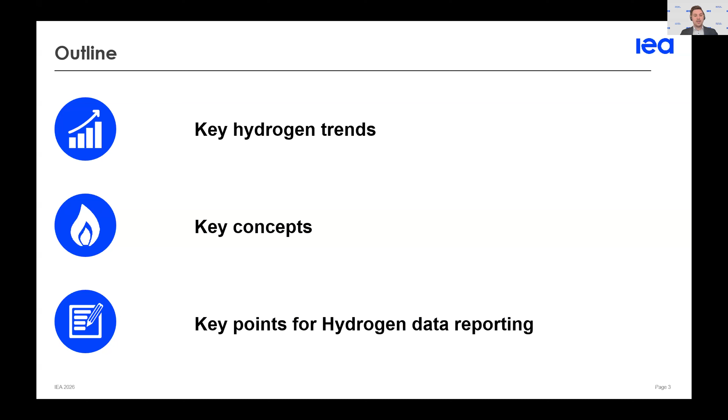Let's get right into it. I want to talk about different topics. First, I want to look at the different key hydrogen trends that we observed throughout the last years. Then I would like to talk about the key concepts, the methodology for reporting, and at the end, the key points for the actual reporting in the questionnaires that we have. Regarding the key hydrogen trends, I will start with an overview, then talk about production and demand, and then also about trade.

So let's first talk about the overview as a whole. Over the last years, there were many investments or committed investment projects for hydrogen, and the number and scale of these projects became larger and larger. All in all, though, hydrogen as an energy vector is still at a very early stage, and it needs regular and effective tracking. Additionally, because of different uncertainties like costs and the lack of infrastructure for now, there are still quite a lot of barriers. But nonetheless, through these trends, we saw the need to develop a common methodology to start the data collection for this commodity. That is why we also came up with this joint Eurostat and IEA annual questionnaire.

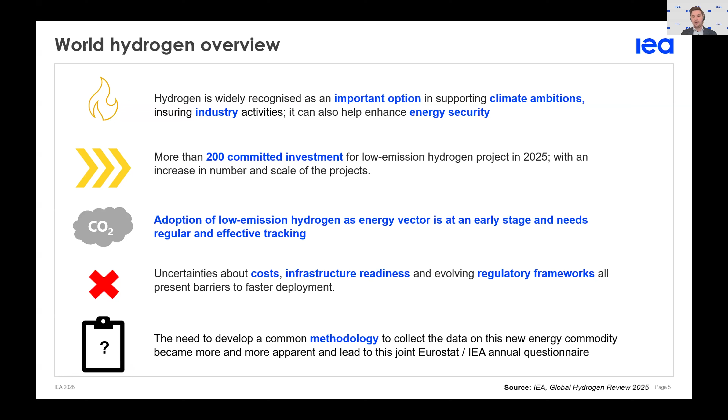Over the last years, global hydrogen demand has increased. It almost reached 100 megatons in 2024, and it is expected to rise even more. Generally, this increase is mostly driven by demand for industrial products that use hydrogen as a feedstock, not really for sustainable activity. That makes up only around 1% of demand, though it is still increasing quite rapidly, with an increase of around 10% in 2024, but the base is still very low. So most of the demand is still conventional and used as a feedstock. Regarding regions, it is visible that especially in China, North America, and in the Middle East, there the most hydrogen use is recorded by region.

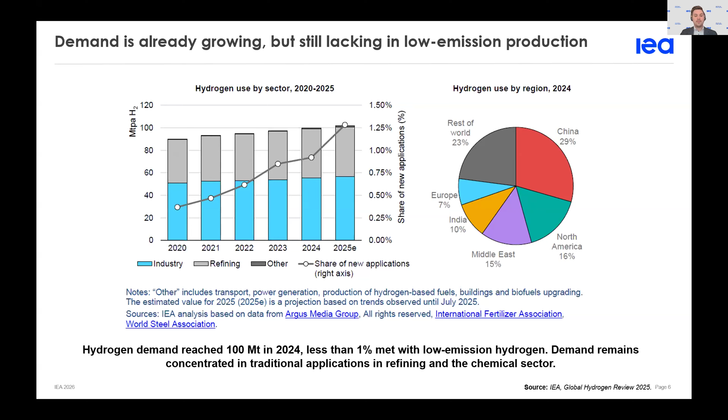If we look at the demand in industry, we can see that it's also growing and is the largest use of hydrogen around the world, with 55 megatons in 2024. From a year-on-year perspective, it increased last year by 3%. Most of this demand, around 60%, is for ammonia production, 30% for methanol, and 10% is in the iron and steel sector. The trends clearly show that demand is growing. Regarding regions, we can see that especially in India and the Middle East the demand is increasing, while in Europe it is going down. That also shows that Europe is more likely to import in the future rather than producing it itself. Generally, hydrogen demand is growing and the growth is also accelerating over the last years.

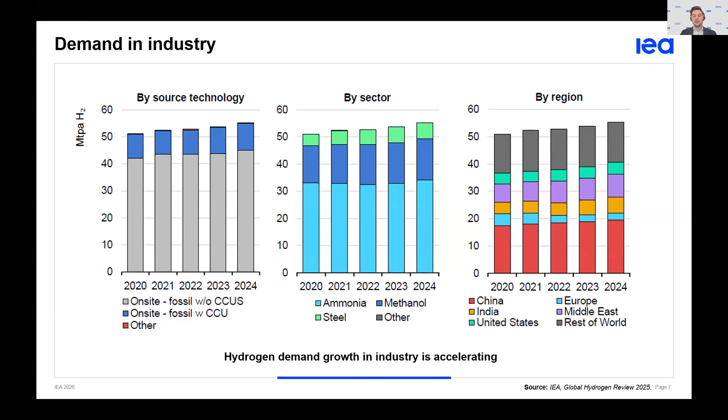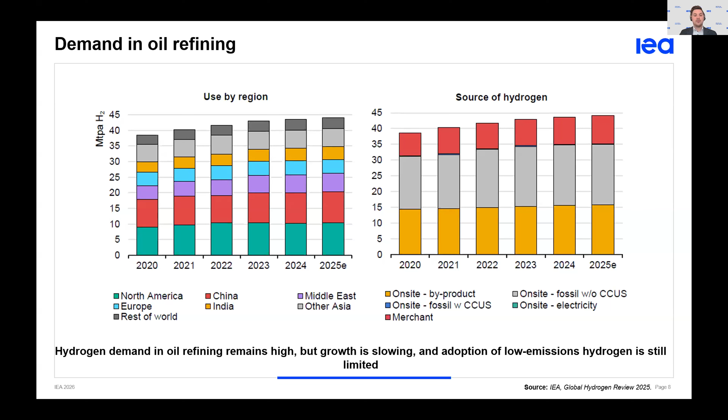Now we will have a look at hydrogen demand in oil refining. Here we can also see that the trend is generally increasing, though the growth has become slower in the last years. Oil refining as a whole is the sector with the second highest hydrogen demand after industry, just slightly below it, with 43 megatons in 2024. Most of the growth in previous years originated from the Middle East. So generally an increasing trend, but slowing down in the last years.

Generally, global hydrogen supply rose by approximately 2% in 2024, and as already mentioned, we are almost around 100 megatons. There is almost no international trade today, or very minimal, so regional output mirrors consumption. For example, China accounts for almost 30% of global hydrogen, followed by North America and the Middle East, both contributing around 15%. So it's very focused on a few regions in the world.

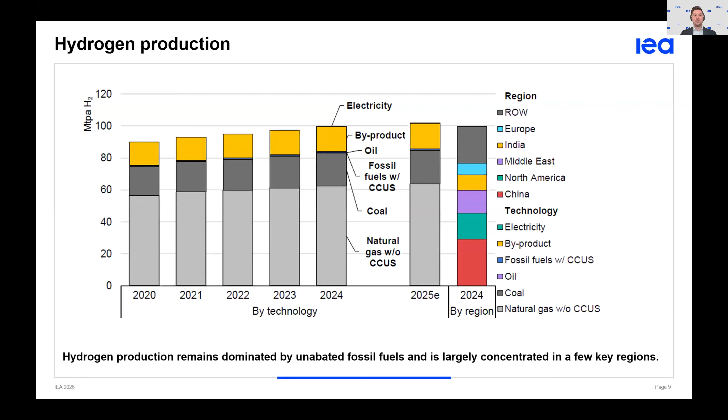Now let's look at the electrolyzer deployment or capacity. Here we can see a very dramatic trend comparing 2024 and the estimated 2025 figures. There is a very large increase, especially in China, where 50% of the new capacity growth is accounted for, especially because of very large installations currently being built up in China.

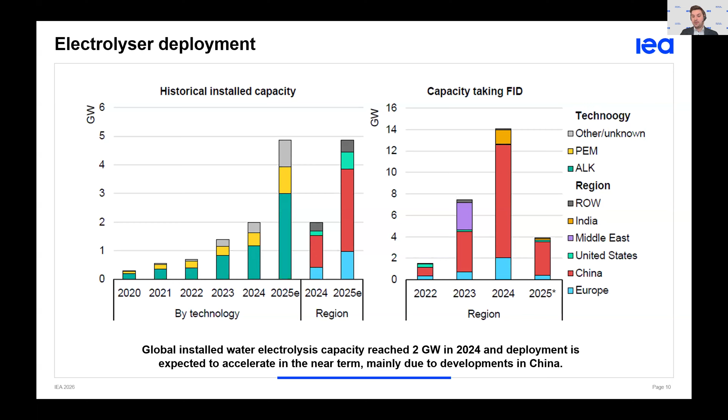So now let's look at the key concepts for hydrogen as a whole. We'll first look at some definitions, then at the hydrogen balance, production, trade, and transformation in refineries. This is basically the structure.

So all in all, hydrogen is a gas that is odorless, non-toxic, and highly combustible. We treat it in energy statistics like a derived or secondary product, similar to secondary oil products. The unit of measure is terajoules, generally used in the questionnaire. Regarding purity, there is a common methodology of using 98% purity, because it is assumed that below this purity level there is no real possibility or need to use hydrogen.

So what we are covering in the statistics is generally the intentional production and also the production as a byproduct. Then the consumption is both when it's auto-produced and auto-consumed, the quantities. We also capture energy and non-energy use. What is also important is that we're not looking only at clean or green hydrogen, so it is not really like a sustainability accounting. We are accounting for all hydrogen.

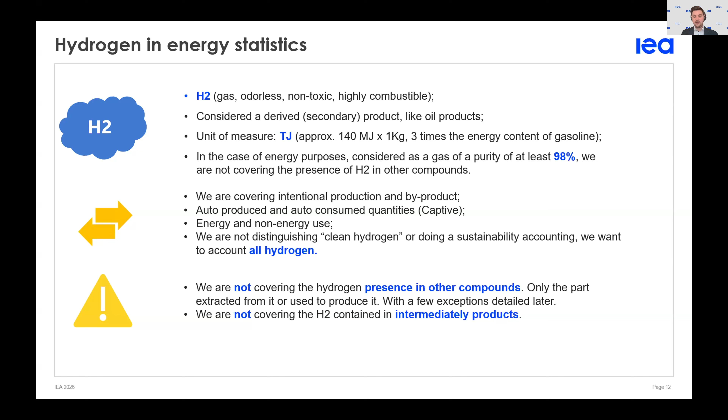As we saw before in the conventional cases with oil refineries, for example, we really want to account for all hydrogen. Another important point is that we do not cover hydrogen that is present in other compounds. Only if the hydrogen is extracted from another compound, or if it is used to produce another compound, then we account for it. Otherwise not, except a few exceptions that we will cover in a second. And also we are not covering the hydrogen that is contained in intermediary products. So regarding the exceptions, as I just mentioned, there are two of them.

So those are ammonia. That is a commodity that is, as we saw before in the trends, already produced and also exchanged a lot worldwide. There are different applications in both non-energy use and energy use, and it is also used as an energy carrier. And therefore, naturally, there is a lot of interaction with hydrogen.

Another exception are e-fuels. Those are still in a very early state, so the production is quite low. But they are basically created through electrolysis, and the same accounts for RFNBOs. Those are renewable liquid and gaseous fuels of non-biological origin. So for these, we also accept them and account for them in the balance, as can be seen later on.

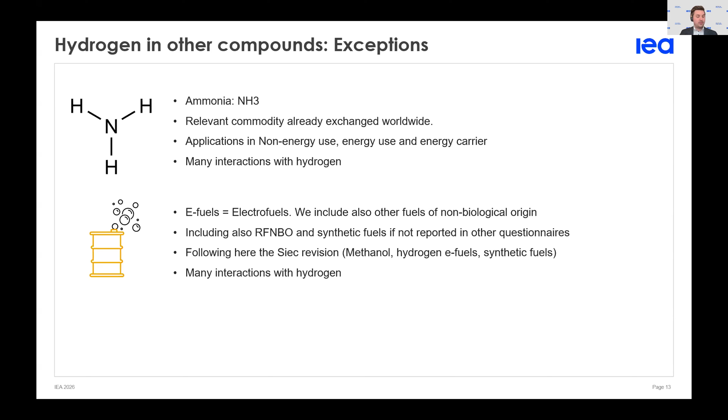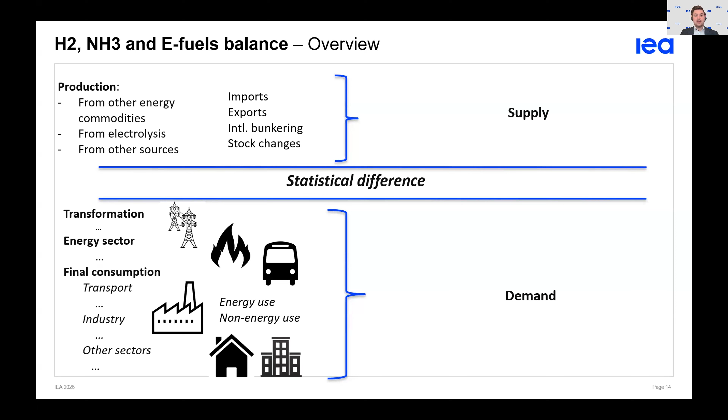So let's first look at production. As already mentioned, hydrogen is not a primary energy product. It is seen as an energy carrier, and therefore it is also produced from different sources, for example fossil fuels, renewables, wastes, electricity, nuclear energy, and also other natural sources. For each of those sources, it has to be reported. Additionally, it has to be reported whether it is with or without carbon capture and storage. So there's this distinction for each of the sources, with and without carbon capture and storage.

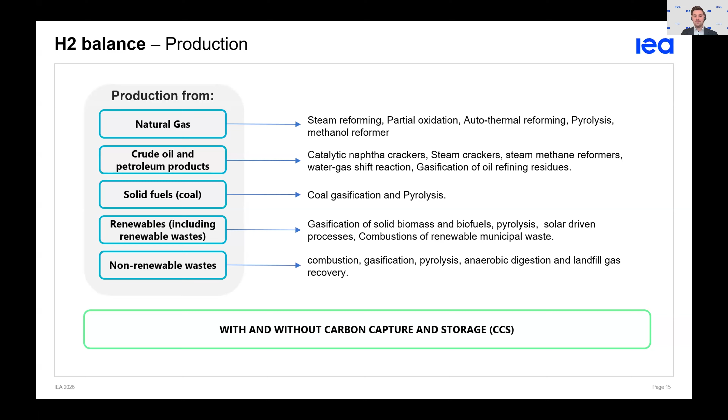Then when we look at electrolyzers, there are also different sources. For example, there's from direct grid electricity. Here it is really the electricity that is used to produce hydrogen, and has been produced from several sources in a central power plant or any other type of infrastructure. And so most of it is from grid electricity.

Then there is the specific case for electricity from renewables, where hydrogen was produced from sustainable renewables directly. Another one is electricity from nuclear, quite self-explanatory, if it is electricity of nuclear origin. And the last one is from fossil fuels, also quite self-explanatory. For all other cases, there is electricity others. As you can see at the bottom of the slide, DL means direct line, so only the electricity production that is physically connected to the electrolyzer should be accounted for.

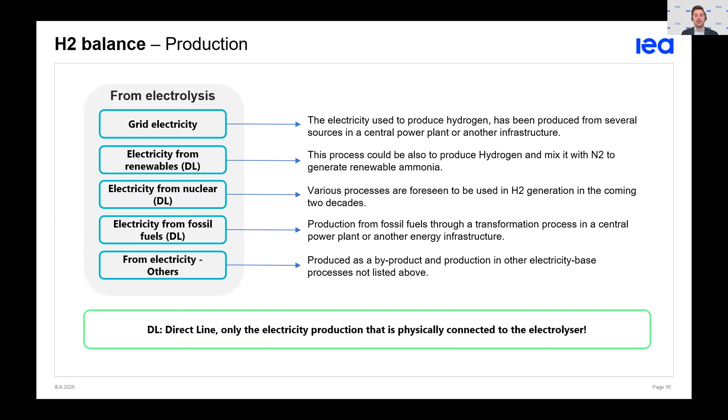Regarding production of ammonia and e-fuels, the same accounts for ammonia. We need to look at all the different energy sources: fossil fuels, renewables, waste, electricity, nuclear energy, and other natural resources. This has to be reported, and also the ammonia has to be reported regardless of whether it is for energy or non-energy purposes. Most of the ammonia production as of now comes from natural gas, which is the most common, helping to see what is most relevant.

Then also regarding e-fuels and RFNBOs, those can also be reported here, also from the different sources. It is basically very similar, but as already mentioned before, it is still at a very early stage of development. So this is less relevant as of now, but it will be reported here.

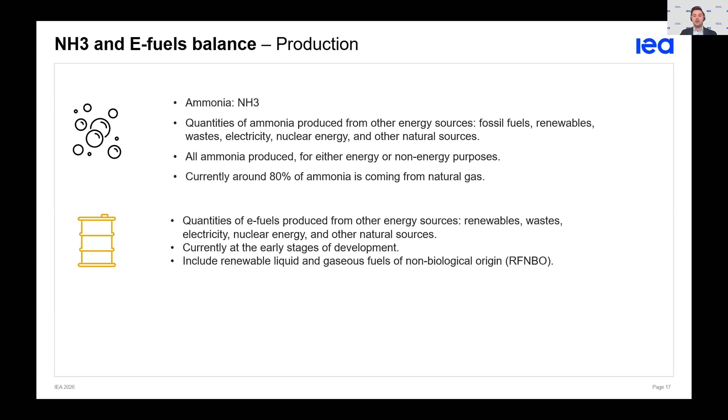Now regarding trade, as in the other annual questionnaires, what is most important is focusing on the country of origin and of the final destination when talking about trade. Most of the hydrogen trade as of now is done by pipeline. Other options include, for example, the transformation into ammonia, as mentioned before, and then it can also be traded.

All of the transformation losses that happen during these processes of transformation will be recorded under transformation losses. So also quite straightforward. And if there is any other form that is used for the trade of hydrogen, it should be reported in the remarks sheet.

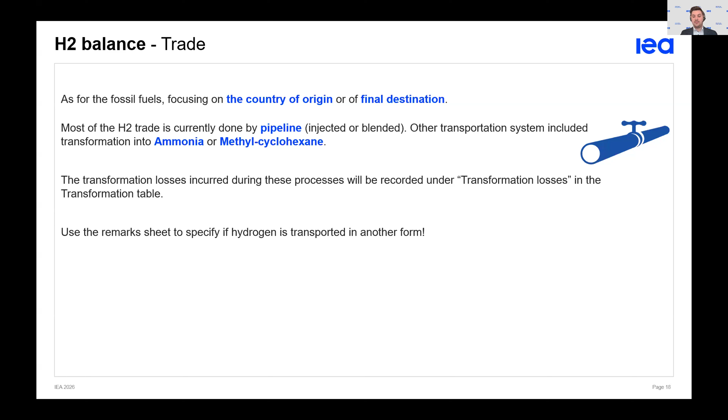There it is converted to gas. The third one is the Haber-Bosch process, where the hydrogen is transformed into ammonia. And last but not least, the Fischer-Tropsch process, where e-fuels are created from hydrogen through electrolysis.

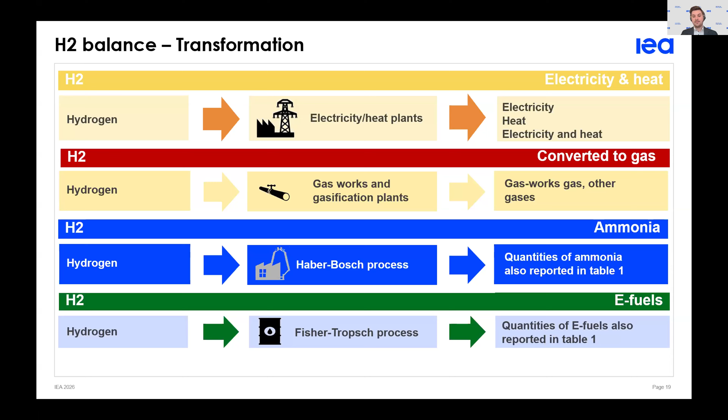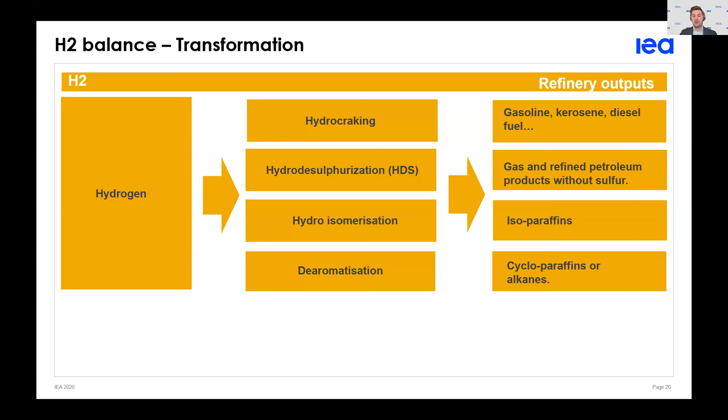And the last one is de-aromatization, where basically aromatics are hydrogenated to cycloparaffins or alkanes. So those are the different applications in refineries.

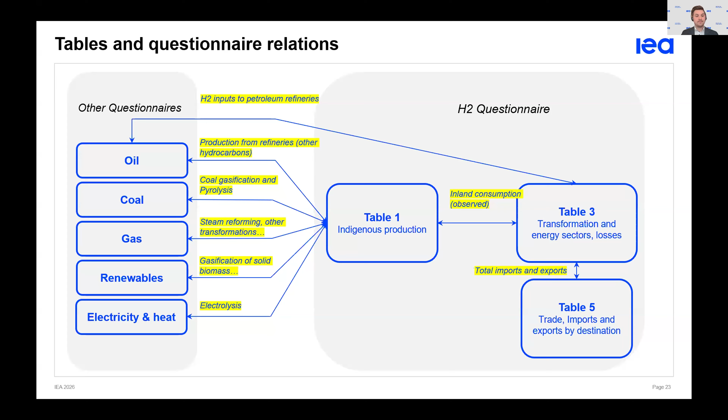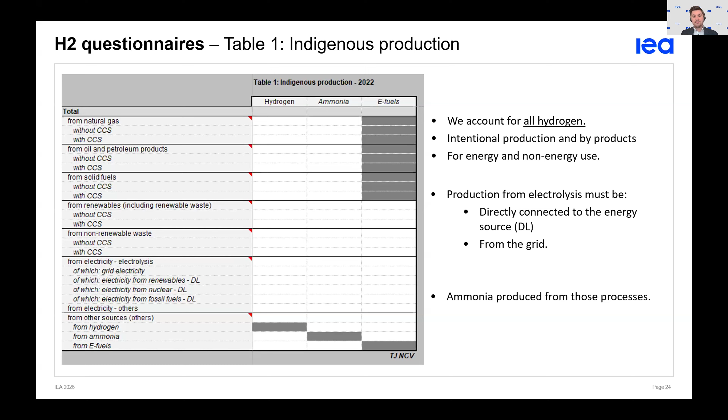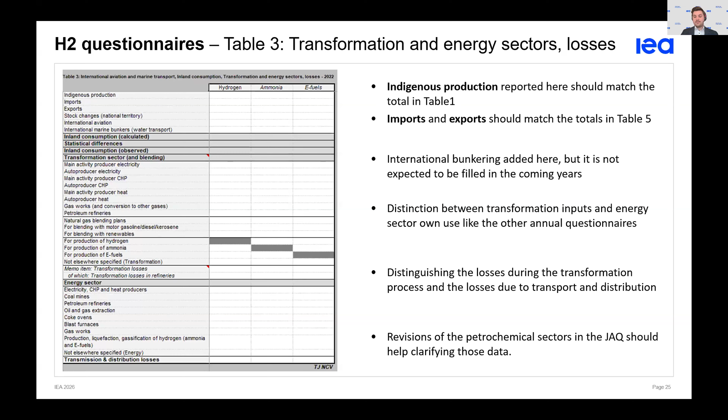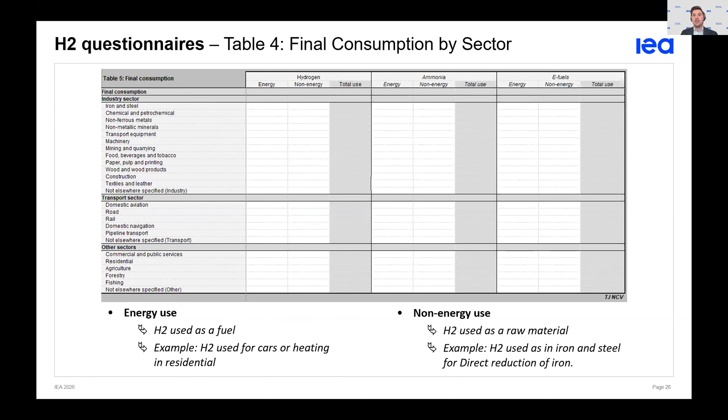Now let's have a look at table 4, final consumption by sector. In the energy use part, we have hydrogen used as a fuel, for example for cars or heating in the residential sector. And for the non-energy use, we have hydrogen as a raw material, more like a feedstock. For example, hydrogen that is used in the iron and steel sector for direct reduction of iron, or also in the refinery process in oil refining.

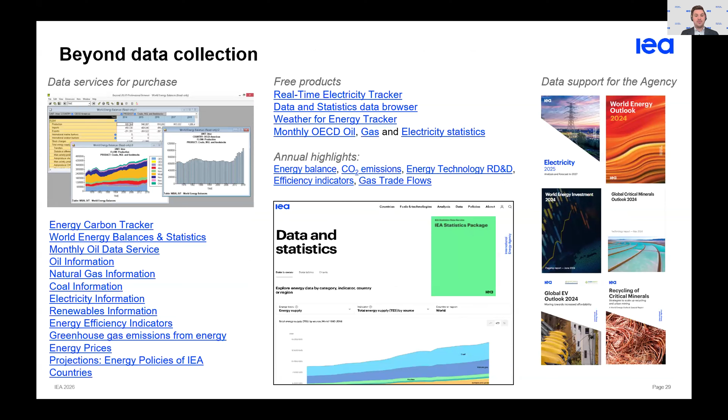Here you can see our other products, as also in the other presentations. I want to thank you for your attention, and if there are any questions, I'm also happy to answer them now. Thank you very much.